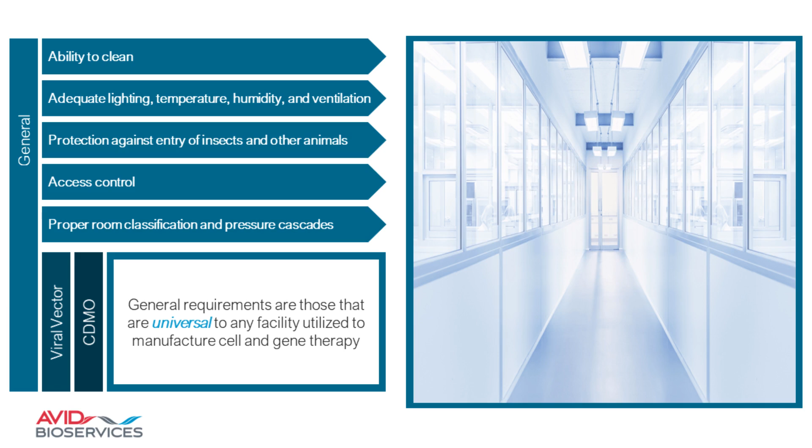And so there's ability to clean, adequate lighting, temperature, humidity, and ventilation, protection against insects and other animals, some level of access control, and then proper room classifications and pressure cascades, whether you're using the European grade system or the ISO system. At least having some of that in place is the basis of biologics production in a GMP clean room. Now we'll get into a lot more detail as we go through viral vector and CDMO specific considerations.

And so the first thing we start with is HVAC design. At the highest level, you have a few questions. One is, are you using recirculated air or 100% outside air? And then the other question is, how do you zone your HVAC handlers? Are you using multiple HVAC systems, each with a dedicated room? Are you having one HVAC control multiple rooms? Are you having redundancy? Are you 100% redundant? Are you guaranteeing 100% uptime?

And so some of our design considerations revolved around this diagram, which is a map of our clean room space. Each color indicates a different air handler. On our clean room, we have 15,000 square feet of clean room, and we have about 8 to 9 different air handlers, all servicing different areas. Anything that's dedicated as a non-viral space is using recirculated air. Anything that's dedicated as a viral space is using 100% outside air.

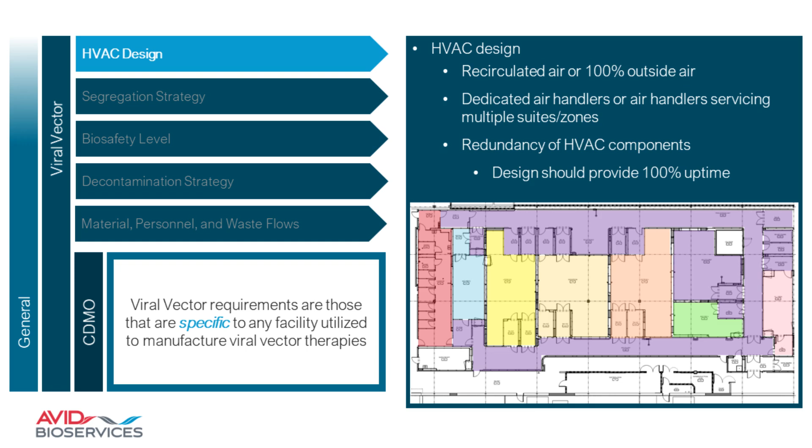All the air handlers are fully redundant, meaning if any single air handler fan were to fail, there would be another fan in place that would be spun up to keep room pressurization. And so this is how we decided to do it based on risk, and that we wanted everything that was viral positive to be completely segregated throughout the facility, which leads us to our next topic, segregation strategy.

And so really there's two segregation strategies that you can use. One is separation in place, meaning that you have either physical boundaries within the room, separate incubators, separate bioreactors, or separate rooms. The other is separation in time, meaning that you use a shared space, but you separate activities through time, and that you would only have one product in a space at one time, open operations occurring within that same space at different times.

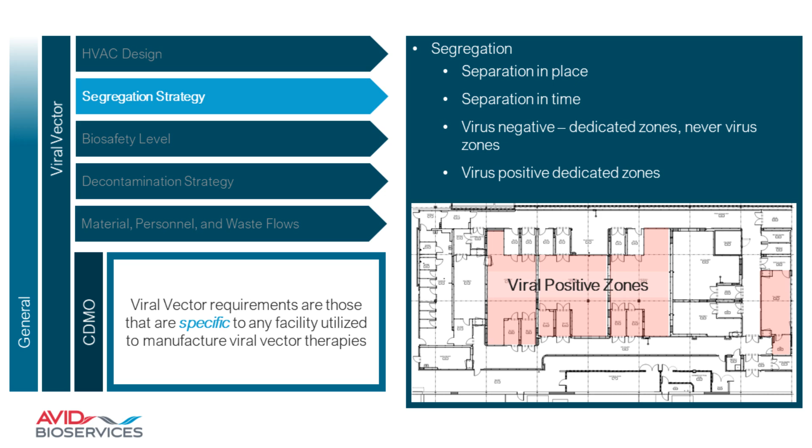And so we did a combination approach. For viral positive zones, we're doing both separation in place and separation in time, meaning only one product available or in use in each of the spaces highlighted in pink. For viral negative zones, they're more of a shared space, and they can have multiple products separated in bioreactors or incubators.

And then really looking at biosafety level, how do you define your biosafety level? For most of our products that we would be making for viral vector, we would be using HEK cells, which are BSL-2 level. And so we defined a BSL-2 envelope, and that's indicated in the pink. The BSL-2 envelope is just another level of safety. Some firms have specific requirements for spill containment within a BSL-2 suite. And so you're looking at zone borders, physical containment of spills, berms around the doors to make sure that if you have any spills, they're maintained within that BSL-2 envelope versus going into central or less controlled areas.

And so again, this was a design decision based on risk. We could have made the entire facility BSL-2, but we decided that we wanted to have some level of spill containment in case we had a leaky bioreactor bag or leaking tubing, that we would have some level of containment to capture that liquid within that space. And so what we have are soft berms on the entry and exits within the material airlocks in and personnel airlocks in and out to contain any liquid that would spill within the area.

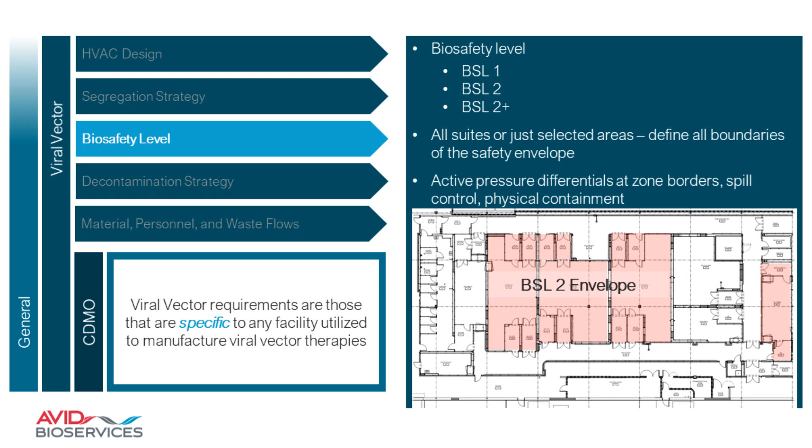And then next, we want to talk about decontamination strategy. And this is in addition to routine cleaning using microbial kill agents. And so what we looked at was vapor systems. And so typically these are vaporized hydrogen peroxide. We looked at that system, which uses a 40 to 50% hydrogen peroxide.

And we also looked at technology that is produced by TOMI. It's called SteraMist. It uses an 8% mist versus the 40 to 50%. And so we do have the SteraMist system, and it's installed in all the viral positive suites. It'll be used in addition to routine daily, monthly, and quarterly cleaning with microbial agents and sporicide, and it'll be used really as part of changeover.

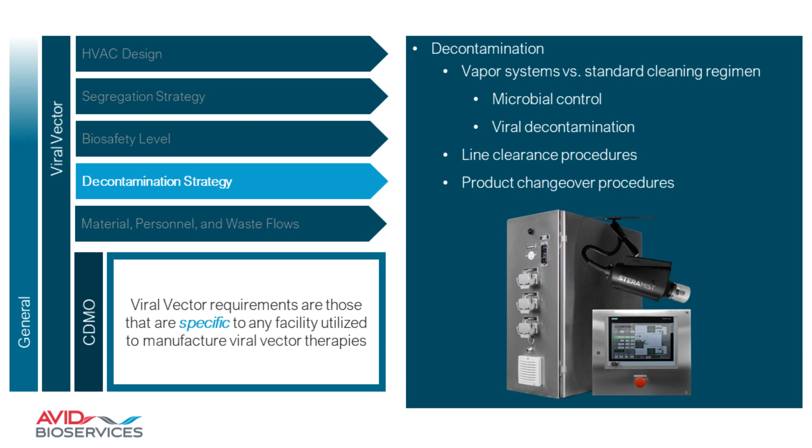And so whenever we finish a viral run in any of the suites, we would use this SteraMist system to decontaminate the room as part of our product changeover before we bring in another client's project.

And then lastly, we wanted to look at facility flows, personnel flows, material flows, and waste flows. And I will say that one of the lessons learned is you cannot spend enough time on these questions and spending time looking at how folks, materials, and product will move through the facility.

We spent a lot of time here with different mock-ups of designs and thinking about how will we bring materials in? How will folks enter the building? How will folks leave the suites? How will materials leave the suites? How will product go from suite A to suite B to suite C? Really, spending the time here makes a facility more livable in the end.

It's very easy to look at a spaghetti chart and lines on a diagram and think, yeah, that makes sense. We can live in that, until you see it built, and then you realize, well, we have a lot of excess flow here. We have a lot of paths that aren't that well thought out.

And so the bulk of our design work, once we had an idea of where we were going from those scoping questions, was really on layout. How will folks move within the facility? How will raw materials enter the facility? How will product move throughout the suites and the production train?

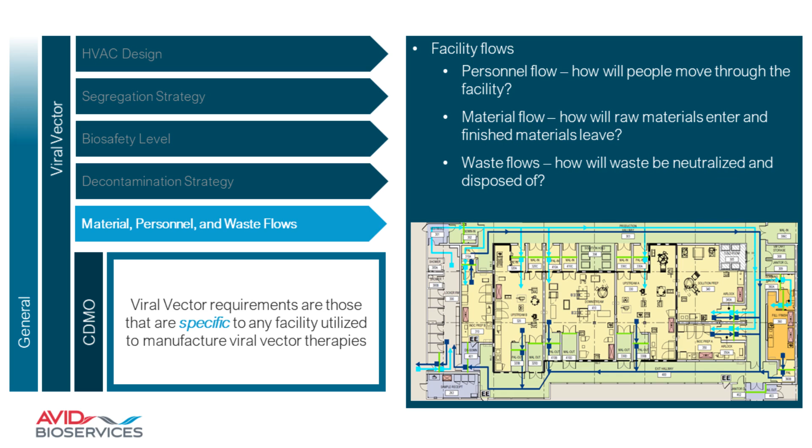And so I think the take home here isn't so much what you see on the screen, it's that really spend time thinking about how folks are going to live in your facility.

And then now we have CDMO specific considerations, and those are ones that we kind of spend some time thinking of. If you're an originator, you have different requirements at the end than if you're having folks coming in, touring your facility, and having person in plant.

And so, not to say we would allow food in our clean rooms or anything like that, but the point is that Jerry and Kramer are essentially people in plant, and they're the worst type of people in plant, right? They're very disruptive, they're causing a lot of ruckus, they're breaking the rules. And so really having folks in your clean rooms is something that you have to consider.

Are they allowed in the suites? Are they allowed just in viewing corridors? What level of training is required? And how will the team on the floor handle any interruptions or disruptions from having additional folks on site?

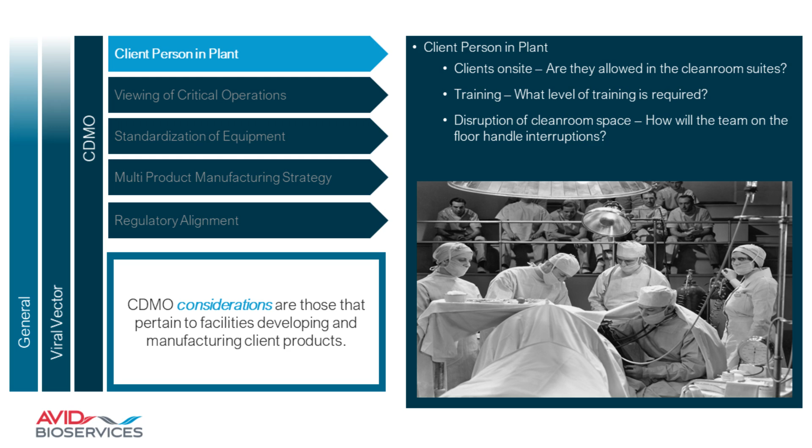And so one of the things that we did was we put in these pan-tilt-zoom cameras in every suite. And these allow for folks to essentially be people in plant, but be outside of the clean room space. They have full control over the camera. It has a 360 view. It's movable by a joystick.

They can zoom in. It has great resolution to the point where you can read a batch record. You can read labels on raw materials if you zoom in enough. And really, they're throughout the suites to allow for folks on site to have an idea of what's happening in the suites. For critical operations, drug substance fill, drug product fill, inoculation, we would allow folks in the clean room for real person in plant.

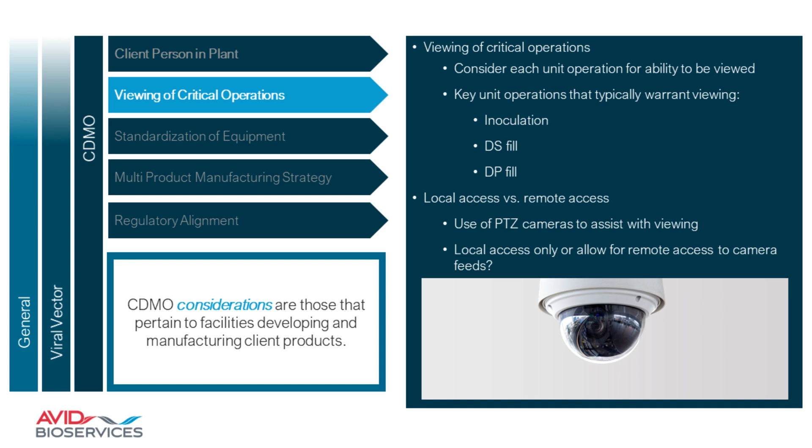But for the majority of operations, we feel that having local access with these cameras is enough to satisfy what most folks would get from person in plant.

And then as a CDMO, the other thing that was very important to us was standardization of equipment. Really looking at where the industry is headed, getting equipment that is not quite bleeding edge, but really on the forefront of technology, things that can meet all data integrity requirements, all ALCOA requirements, have full audit trail from the electronic system perspective, but are also industry standard. They're equipment that you would expect to see. They're equipment that you're probably using at your own sites. So that tech transfer is easy.

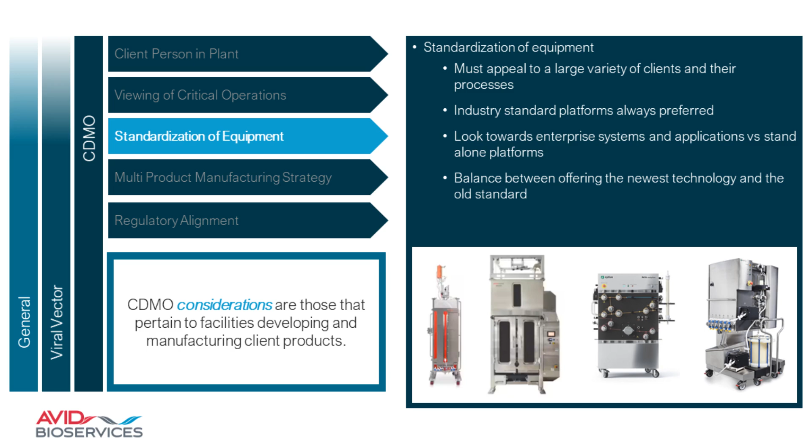We're not bringing on equipment where we're worried about vendors going out of business or have to worry about consumable supplies or life cycle of these pieces of equipment that we chose. And it's always a challenge in choosing equipment for a CDMO in that you want to be industry standard. There's a lot of choices out there. And so really trying to be as agnostic as possible to what clients are bringing to us and having equipment and technology in place that could suit them. Of course, it doesn't work 100% of the time, and in those cases, we have to have a flexible plant where we can bring equipment in and out as needed.

The next consideration was really multi-product manufacturing. How would we handle multiple products in the suite? Again, going back to the principles of separation in space and separation in time, we designed the facility to have two upstream trains, a train A and a train B, feeding the central downstream. And so within the upstream, if it's viral negative, we could have multiple products of the same client running. And then once it goes into the viral positive areas, it'll be a one-to-one, one product in the room, one client. And then having robust changeover and clearance procedures as we move clients and products through the facility.

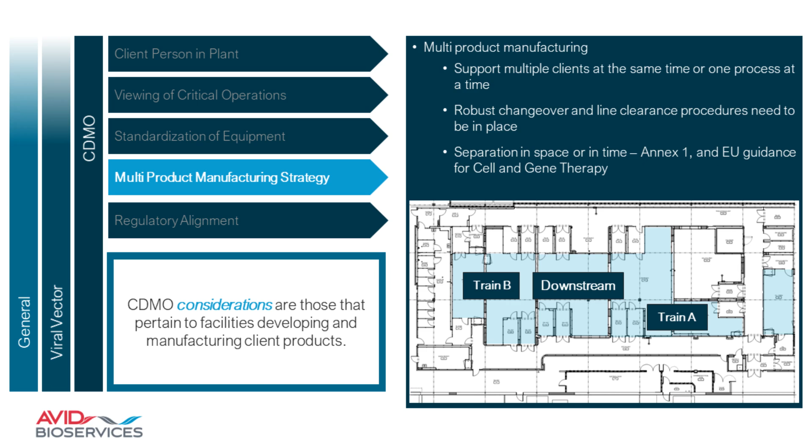And so really it's a culmination of a lot of our design decisions of how the rooms are laid out, really looking at risk, looking at cross-contamination, doing layers of protection analysis, really to come up with robust procedures and SOPs to allow for multi-product manufacturing.

And then looking at your regulatory alignment, are we looking at US only? Are we looking at the European Union? Are we just bound by US GMPs? Are we looking at EudraLex? Are we looking at support for the rest of the world? And so really looking at those requirements and just knowing upfront where we're headed really helps the engineering team design the proper pressure cascades, the proper airflow, making sure we have the correct sampling points for EM.

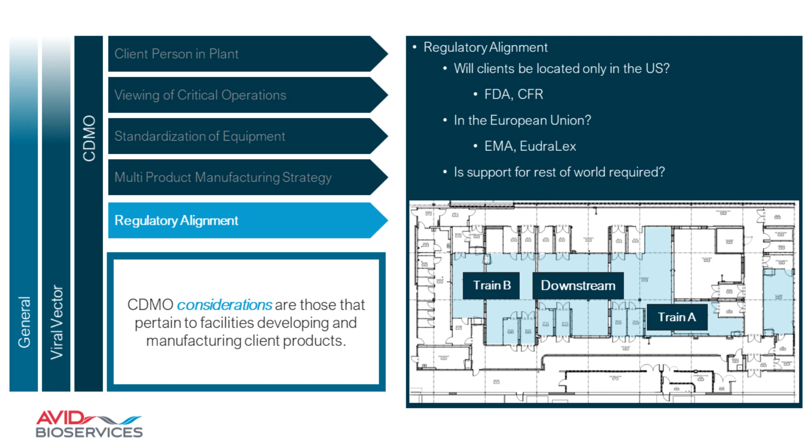All comes down to kind of, are we looking at Annex 1? Are we looking at just being a drug substance manufacturer? For our facility, we will produce drug product, and so we're fully aligned with all the requirements from the recently revised Annex 1.

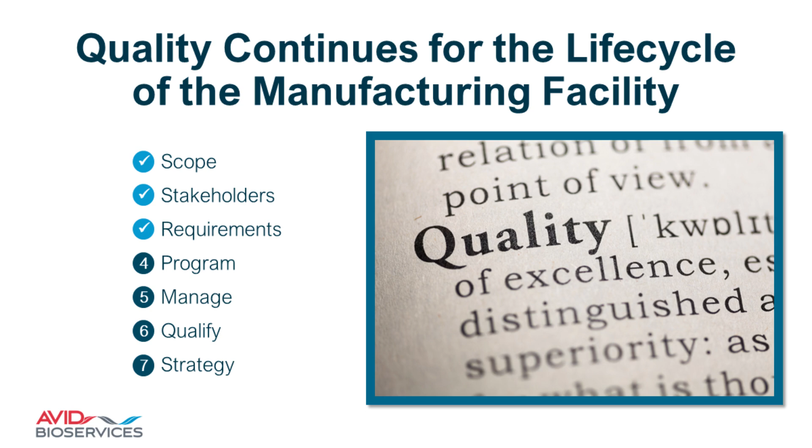And then once we have an idea of where we are standing with scope, stakeholders, and requirements, we start to get into programming the space, managing the construction effort, qualifying the finished product, and then really looking at a strategy for maintaining compliance through the life cycle of our building.

And so for programming the space, we're really designing according to our URS and our regulations. And so keeping in mind all those things we talked about, pressure testing each layout according to our requirements, looking at layers of protection analysis, looking at hazard analysis at each layout to say, is this something we can live with once it's built? Very easy to change design on paper, a lot harder to change design once it's built, even harder to change design once it's qualified and validated as a manufacturing facility.

And the other thing that really comes down to daily management is managing the contractors and the team doing the build on the floor.

And so really making sure those conversations are well documented and that they're crystal clear, because a lot of times a hallway conversation can turn into a change order, which can turn into, best case is something you want, worst case is something you weren't thinking about, and then you show up a week later and you have a new door or a new thing in the facility that you weren't expecting just due to a hallway conversation.

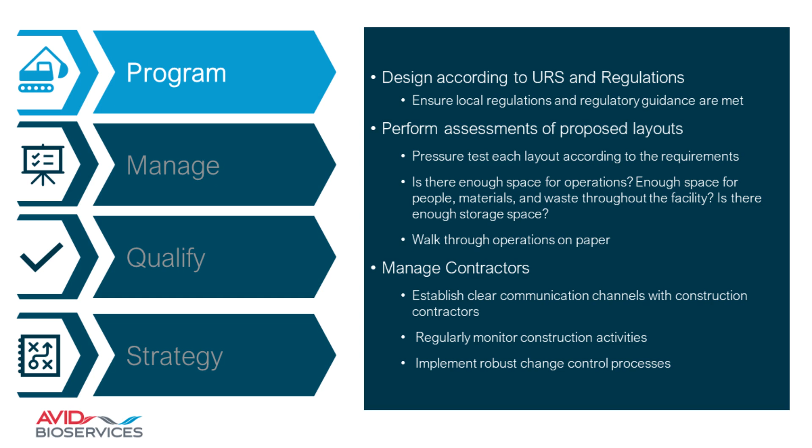So really making sure you're talking clearly to those folks and they understand where we're headed from the build. Make sure you have a robust change control process in place to avoid any of those kind of changes that you weren't expecting. And then really managing the space, looking at comprehensive risk assessments, using tools, using a LOPA tool, using a hazard analysis, implementing risk mitigation strategies, and regularly monitoring and evaluating your risks.

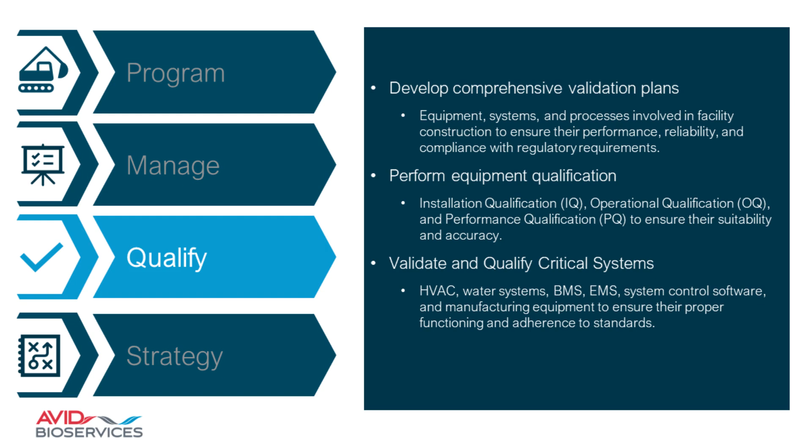And then for qualification, this is standard, the validation team would come in. We start looking at installation qualification, operational qualification, performance qualification, and then start validating the HVAC, the water systems, the BMS, EMS, system control software, and manufacturing equipment. This is really something that you start as building qualification, and then you continue on through the life of the facility with continuous requalification efforts.

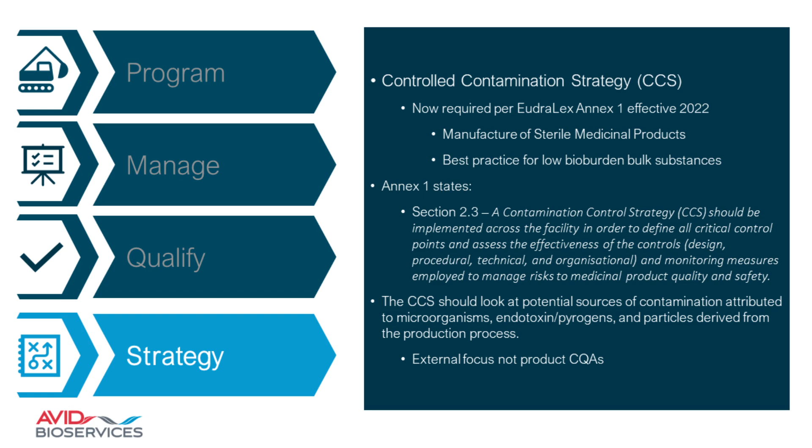And then last, we'll go through this sort of quickly, but it's a contamination control strategy. It's introduced in Annex 1, which is effective in 2022, and it's used for the manufacture of sterile products. It's also best practice for low bioburden bulk drug substance. And really, the CCS is looking at external contamination, not product CQAs.

And so what we look at is facilities and utilities, equipment, personnel, process flows, raw materials, container closures, cleaning, disinfection, monitoring, and then continuous management of these systems to ensure that you have a control strategy that will eliminate or reduce particulates and microbial ingress into your facility and into your products.

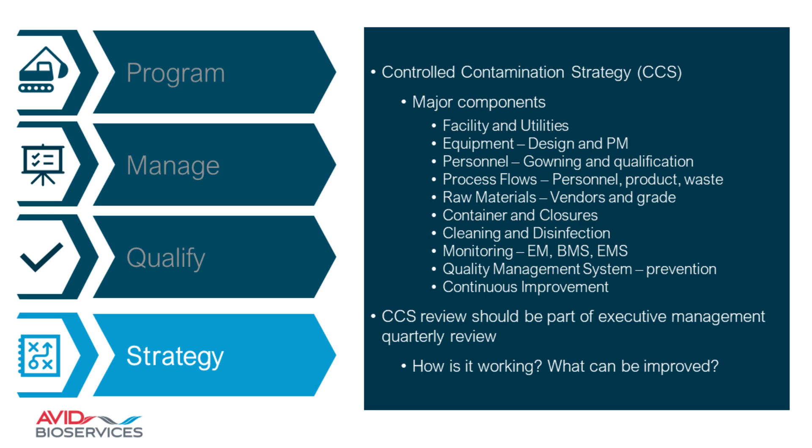And so the expectation is that this is a continuous program, not just separate SOPs that are kind of operating in tandem, but all put together and looked at on a quarterly basis, a yearly basis to say, how are we doing from a control perspective? How are we managing contamination? How well is our program working in whole?

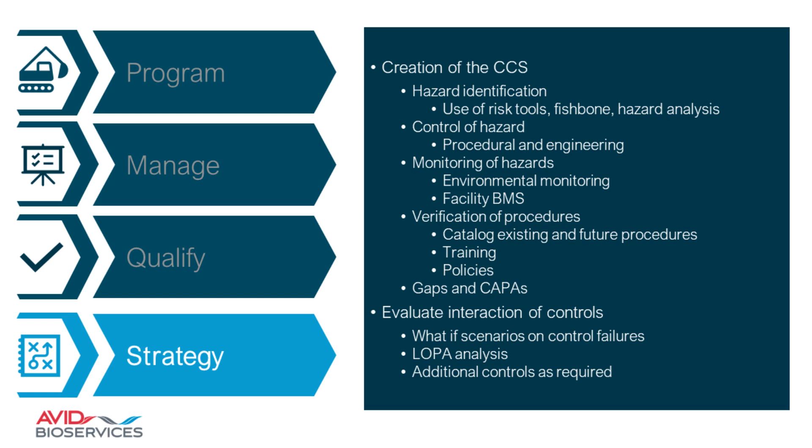And so really this is hazard identification, control of the hazard, monitoring the hazard, and then verification that you have procedures in place to address those. And then on a continuous basis, looking at your EM, looking at your data, addressing gaps with CAPAs and corrective actions to ensure that you stay on top of your system and that you're continually having good control of contamination events within your facility. And then when it's all said and done, hopefully you have a nice facility.